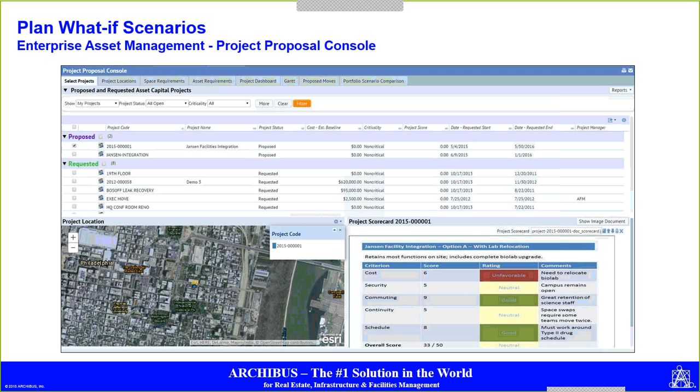We've also taken a look at how to better consolidate the planning process and bring in some of the plans to acquire new assets as part of your portfolio. So as you're planning strategic direction within the organization and proposals for expansions and big retrofits, included within that will be the ability to add more details around some of the requirements for assets in the portfolio.

One of the items I'm most excited about is the strategic space planning application added to the system. What's nice is that it fully engages you to create a number of scenarios about your portfolio, leveraging what you currently have to develop plans going forward, and naturally to generate stack diagrams.

We'll get deeper into this, but also to understand the current capacity of your facilities and measure that against the current allocation and future plans, so you can see when you're going to run out of capacity and availability, and know when to lease more space or add new capacity through construction and acquisition.

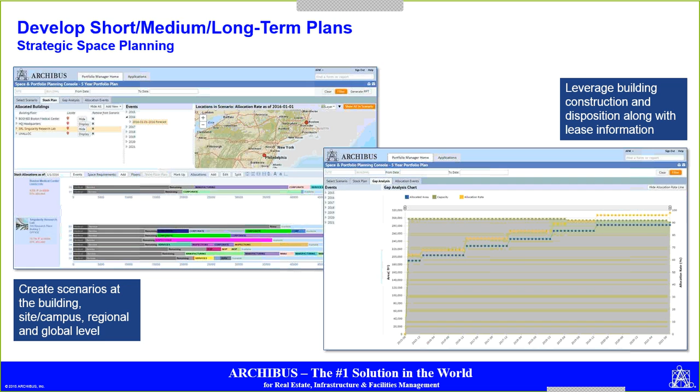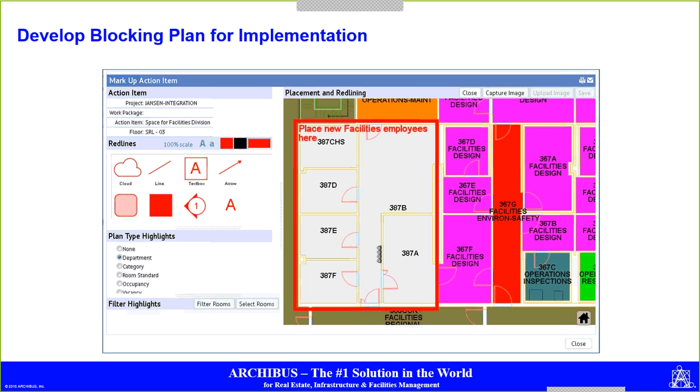We've also incorporated an expanded use of the red line capabilities within the software to help facilitate more detailed planning exercises around your facilities, so you can convert your stack diagram into a combination of block plans and/or allocation plans for what you expect to do in the future.

But before we do that, let's talk a little bit about what it means to go to version 22.1, and how that will impact those of you that already have things like space inventory and performance, personnel and occupancy, maintenance and operations, and a few of the other applications.

To get in line with this, let's talk a little bit about the space planning capabilities of the software and things you can do to better coordinate move activities. One of the things would be to actually generate move projects right from the space console.

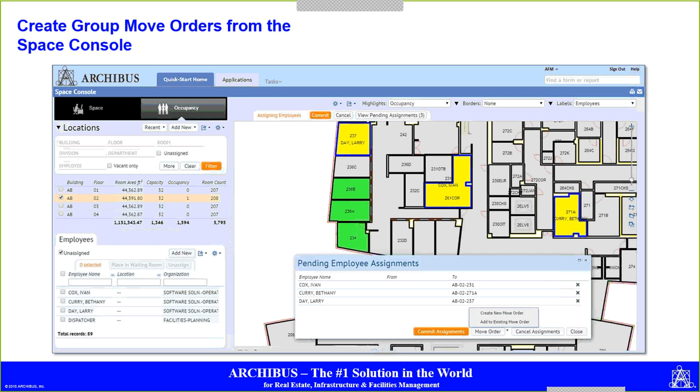In a second here I'm going to demonstrate how easy it is to now create a move project right from the space console as you do your initial planning. So the way to do that, we'll just drop in here and actually see what happens.

We have begun a planning exercise where we've already located some people on the floor plan, and we're in the process of using the drag and drop features to place employees onto the floor plan based on a move we're currently facilitating. We're looking at where we have available capacity and/or vacant space.

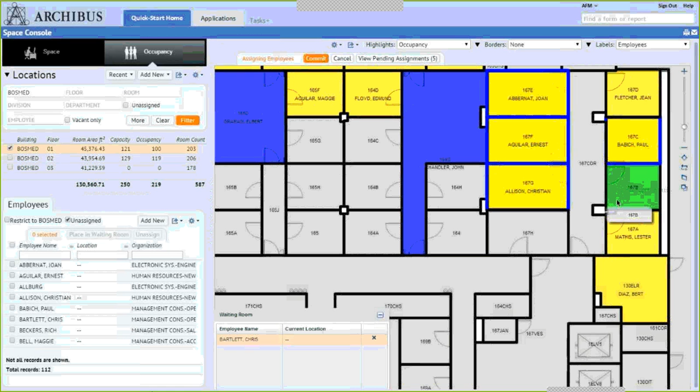Once we've completed assigning people their locations, the next step is to view those assignments. As you can see, we have 5 employees. Typically we would commit those assignments, but what I'm going to do is actually create a new move order, something I'm planning to do at some point in the future.

From this, I'm actually connecting to the move management capabilities of ARCHIBUS, and what I'm going to do is generate a new move project.

If we were in move management, we would actually be doing this, but we can do it right from the space console.

In this case, what I want to do is coordinate the move around the BOSMED building and assign one of the appropriate people to be the point of contact for the move, and then designate when that move will occur at some point in the future—within a 3, 4, 5, 6 couple month window—whatever makes sense for how you plan and coordinate moves.

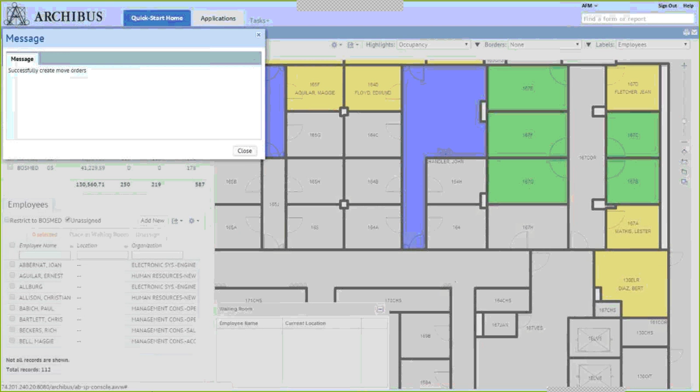Now that I've actually created the move project, ARCHIBUS is creating all of the necessary move orders and looking at the move project. As I use my page navigation, I'm going to go over to the Enterprise Move Management application, and quickly check to see that that was created.

From here you can see that I've created an ARCHIBUS move. Its status is correct, requested, and I have the 5 people I assigned coming from no location into the locations I've designated. What's good about this is now I can use the move management project to do all the move planning scenarios, add additional people, and make changes accordingly before I complete the execution.

So I just wanted to share with you, this is a new feature. It's available in 22.1, and it's something that I found very exciting.

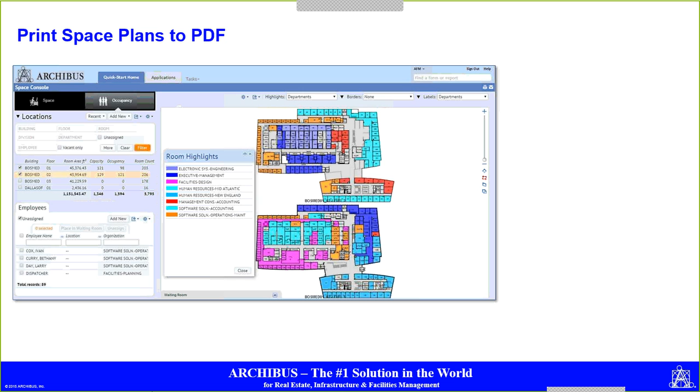Every year at conference, people ask how to print plans from the browser environment, since some rely heavily on paper output. Working with our development team and listening to users, we've come up with an exciting new set of capabilities that give you better control and output to a PDF format for printing.

There are a number of powerful new settings, but the most important is the use of asset text. In 21.3 or earlier, printing to PDF uses dynamic placement of text. In 22.1, you can now coordinate the placement of asset text based on the asset text in your actual AutoCAD drawing files, giving you higher control for odd-shaped rooms where you want text placed exactly where you want it.

You can also control the heights and dimensions of the text to make it easier to read, since often you've output a plan and found overlapping text. So let's go through that process here in a moment.

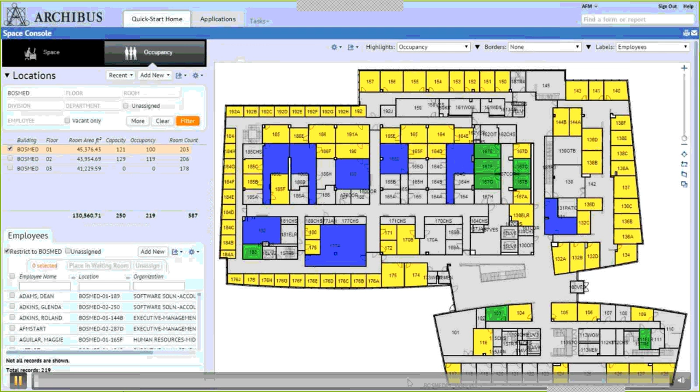What I'm going to do is activate the new command called Generate Ad Hoc PDF Report. As you can see, we have the ability to determine a number of different parameters, and one thing we're going to do is change the text type. We've already filtered just for the BOSMED building and its three associated floor plans, and we've now generated a PDF file.

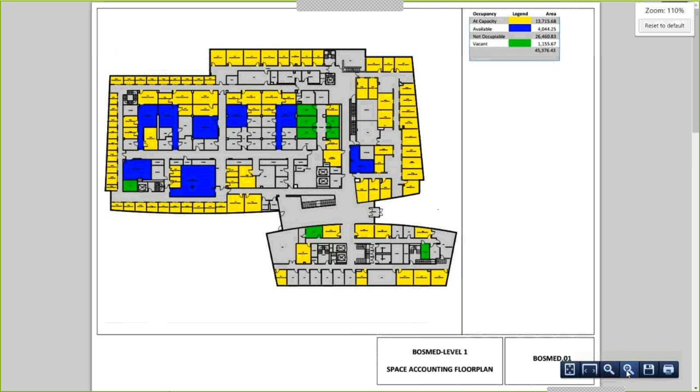The big distinction here is that any asset text in the drawing is now positioned based on the asset text from the actual AutoCAD floor plans, and the size of the text is much better controlled than previously, so we don't get clashes of overlapping text. You can see how easy it is to read, and it generates a PDF file for you to work with.

Moving on to other improvements, let's focus on the building ops console for those that use on-demand work. One key area people have expressed concern about is performance, and what we can do to better enable people to jump in and view the information.

There are some new parameters we've added in the settings that I find very exciting. One is the ability to collapse the bands of different types of work coming into the screen so you're not loading all the data at once. Another parameter controls the number of records displayed in the band, loading them progressively until you reach the full amount. This makes life easier and speeds up the performance of the consoles.

Let me jump in and show you what I mean. We are in the home page for facilities, and we jump into the building operations console. As it comes up on screen, you see the banding, and we're displaying 20 records at a time within the system. As we scroll, we can load more data, as you see me do here, so I can progressively scroll through all the records I need to view.

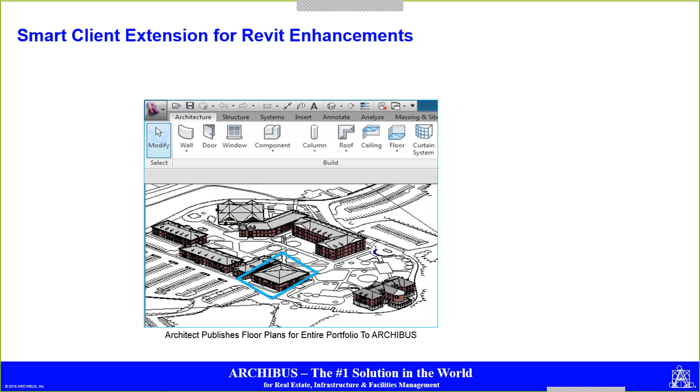What are some other things we're doing? We're continuously evolving the use of the Smart Client extension for Revit as more users grow interested in what it can do. We're making sure we have connectivity between the Revit models and the ARCHIBUS database, and that includes linking to all the different models that are created. So in addition to the architectural model many people work with, we can now link to the mechanical, electrical, and plumbing models as well and pull in that data for information. I don't have a demonstration for you, but if you contact Robotech, we can certainly arrange to view that.

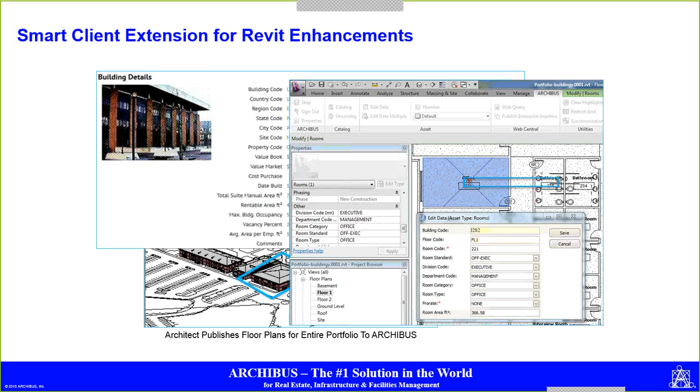Looking at a couple of other enhancements across the product applications, one area of interest for a lot of folks is tracking all the different parcels associated with their properties and managing some of the taxes. So we've set up a mechanism by which you can identify all the parcels and schedule payment for taxes within the system—a new feature I think a lot of people who do real estate portfolio management will be happy to see.

Another great capability is the use of geospatial capabilities involving both Esri and now Google Maps, and I want to stress that it involves both Esri and Google. There are a number of things you can do, including mapping locations of your assets, properties, buildings, assets, people, etc.

As you can see, when you're zoomed out, it clusters a number of items, and the goal is that as you zoom in, you can dig into deeper details and uncluster those markers. At the same time, the markers have added new capabilities, providing a range of colors to denote certain capabilities, and size to denote a level of scale associated with the properties in question.

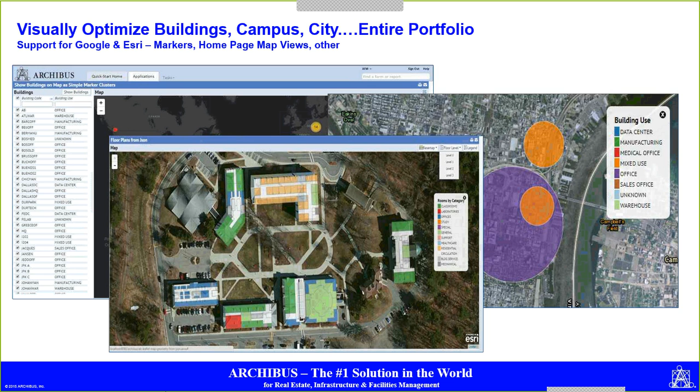Finally, we continue to improve the ability to take your campus-style map and place the footprints of those buildings on the map, then use that to drill down and see the variety of floor plans you have, so you can see how space is being allocated or classified across your campus for a variety of uses, helping with planning going forward.

Finally, for the nerds in all of us—and I can't say that I'm nerdy, but I do have to start and stop my local system.

We have taken the capability of doing all the systems administration roles for starting and stopping the various servers outside of the smart client and placed them in their own setup console, so people will be able to restart their servers for any number of reasons as they apply changes to their databases. These are just a couple of the settings you'll see in the console, and for those who do that a lot, you'll notice that has been split from the smart client itself.

Moving on to some of the fun new stuff, one of my favorites is strategically planning space. Let's take a look at what that means for us.

The goal here is to enable anybody to go into ARCHIBUS and leverage the data that exists within it to develop plans, whether across the entire portfolio of buildings you have, or for a number of buildings you want to plan specifically for. It can be within a given city, state, region, or across an entire country, depending on the kind of plans you want to develop.

So naturally, we want to start with a simple thing: developing a space forecast, using the current inventory to help define what that means. Where do we get that forecast information from? Exactly from ARCHIBUS, at the level of detail we determine we want to look at—it can go up to the business unit, down to the department.

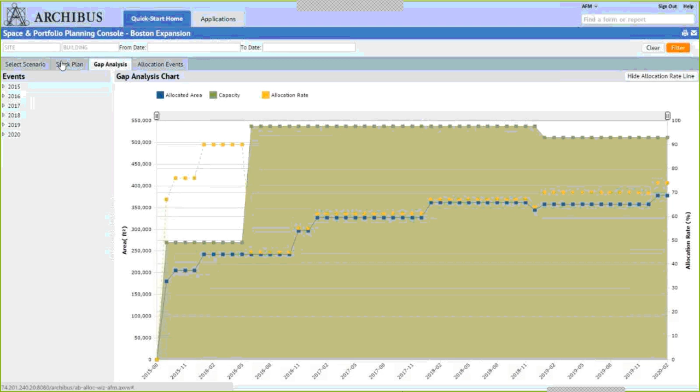Let's return to the stack plan, where we can see how we've allocated space for the year 2017. Let's start looking at some planning by generating a markup. In the markup, we'll do some simple blocking plans, using some of the new redline capabilities to help denote what's going on.

In a case where we don't exactly know the floor plan, we could turn off the highlights and assignments of space to departments and do a more generic placement of space on the portfolio. So we'll drag and drop some areas to denote the blocking plan, highlighting the areas in question and allocating the space as best we can.

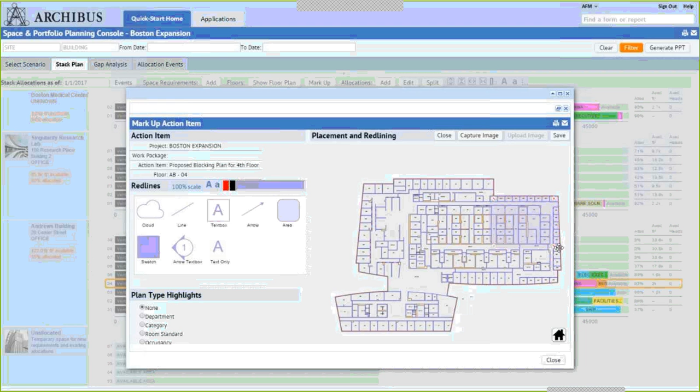We do that for as many places as we have, being sure to identify which departments we're looking at. I'll speed through this a bit so we can get to a finished, or at least quasi-finished, example. The goal is to allocate a number of different areas.

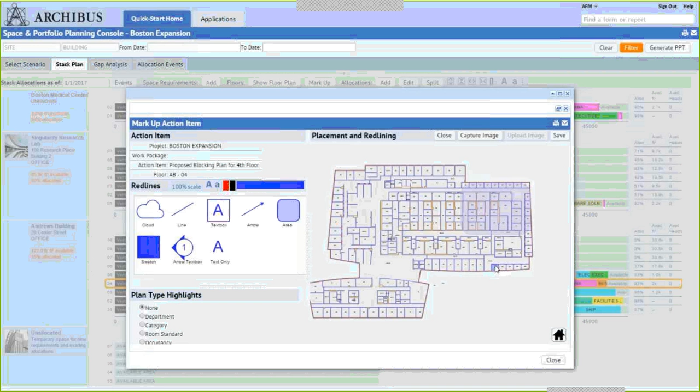As you can see, your demonstration jockey—me—doesn't always push the right button, but here we're grabbing a different area to represent another part of the allocation stack plan we talked about, making sure to assign the space. We'll add one more in the sequence to fulfill at least some of the front planning. You'll notice I can allocate as many different areas as I want and choose what parts of the floor plan to work with.

The whole goal here is to help the people doing that initial stack diagram take it to the next level, deciding how they want to allocate space on the floor. In essence, what they're doing is saving that change and making it part of the planning process.

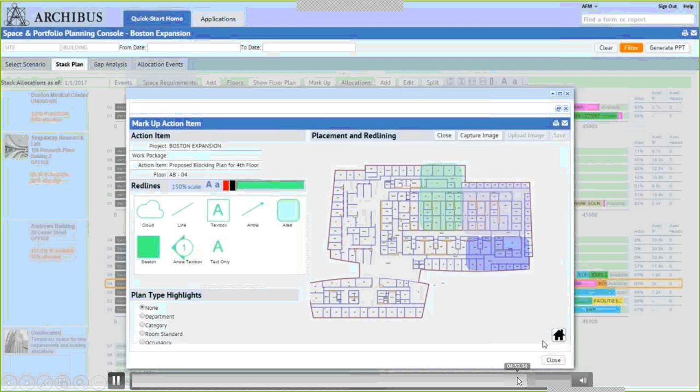So we'll go ahead and move on to the next set of steps here. We've saved this, made that part of our planning exercise. Not only have we done the stacking, but we've now incorporated the ability to do some of the blocking and assignment of space to help the planners determine the next steps once the plan's been approved.

As we move through the various stages, notice on top we've actually taken away the Boston Med building because we are no longer leasing that space, and that's tied directly to the lease tables because the leases have expired. In the meantime, I've done everything I can to take the planned space requirements from down below, called unallocated, and from the Boston Med building, I've dragged and dropped all the space necessary to move it to the different buildings to consolidate space.

And if you look down below here in the Andrews building, one of the things I did was create new space that did not previously exist, because we didn't have that kind of organization. It could be based on the acquisition of a new team, or the acquisition or creation of a new capability, and we've added that as part of our planning process.

So at the end of the day, we can plan any number of portfolio changes based on constructing new buildings, leases starting and expiring, or buildings purchased or sold. The scenarios can include things like forecasted growth or new business lines added to the organizational requirements. From that, we can generate the blocking plans we need to move from the strategic down to the tactical when the time is right.

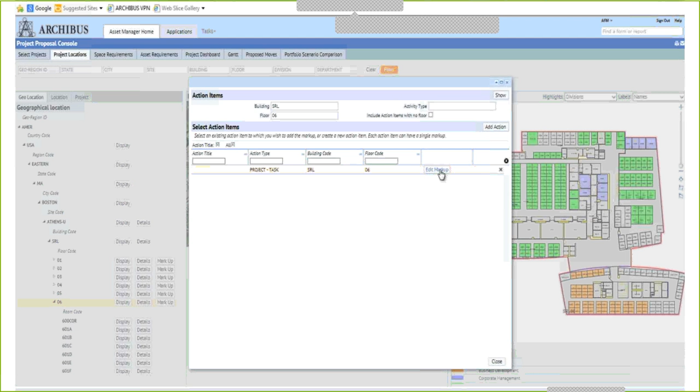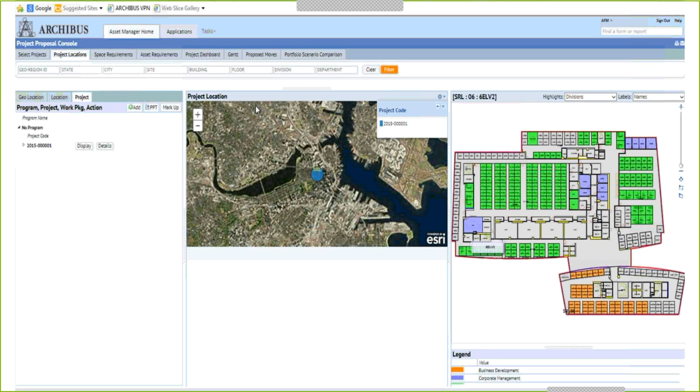Naturally linking any sort of markup, similar to what I did in the strategic planning capabilities, so I can position maybe the placement of new assets within the portfolio, or assign what organizations are going to be there. This ties back to the portfolio planning process. But at the same time, I can also generate this output in such a way that I want to share the information about the project for people, and actually pull that information from ARCHIBUS and reflect it in a PowerPoint so I can see some of the details I'm trying to process.

So we pull in those space requirements using the forecasting that you saw before. We pull in the asset requirements, identifying what we need for assets in the portfolio. Maybe we're going to be buying some new test equipment, medical equipment, or production equipment, and we want to make sure that's included in the plan because it requires a lot of detail in terms of what items we will need to properly assess all the tasks and investments to pull together a proposed plan moving forward.

Naturally, we can use this as a planning exercise to show what the timeline is for a given project, so we can see what is supposed to happen and when. Again, we're tying in our project management capabilities.

And then finally, once we're done looking at the various projects, we can start comparing various scenarios to see what makes the most sense in terms of analyzing the portfolio within the system. These are capabilities that are very useful in linking multiple aspects of ARCHIBUS to help you do the planning necessary for future changes to the organization.

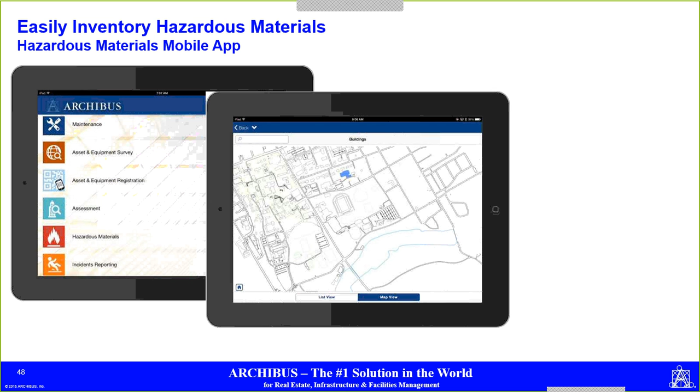In sequence, the next thing we want to do is take our hazardous materials app, which was previously named MSDS, and go through an extensive ability to inventory those assets. We've also created a mobile app to help support that endeavor, and the goal is to sync with the various locations in our portfolio and be able to pinpoint on those floor plans where we have different types of assets, hazardous materials, and the types of materials that we have.

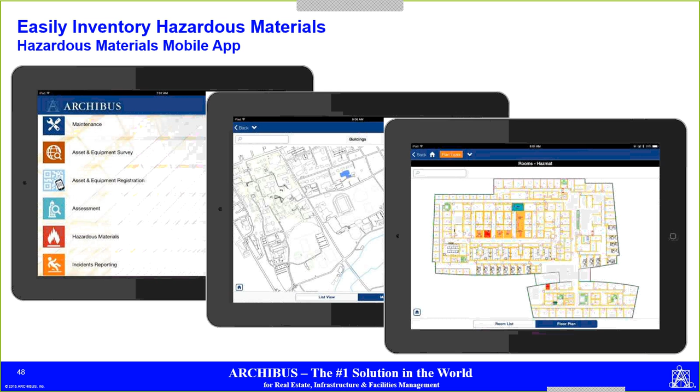But we took it a step further. We also inventoried much more closely the different materials in those rooms, identifying each by room location, but also the quantity and amount of those items in the inventory and when they're available, and then attaching the relevant documents, the safety data sheets themselves for those people that are needing them.

In doing that inventory, we can do it not only at the room or space level, but we can actually go to a shelf or a cabinet and a bin and identify very precisely where we can find these materials, which is very useful for emergency preparedness. So now we can look at all the materials within our facilities and identify the severity of those items, where we can find them, and when was the last time we checked the materials.

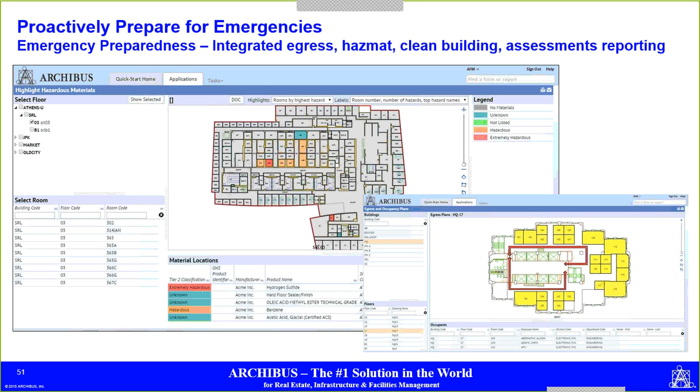This is great because now with emergency preparedness, we can link all of this information back into ARCHIBUS, and for first responders, we can better identify where the hazard conditions are, and what situation a responder would be looking at if they were to arrive. At the same time, identifying the location of all employees and all access and egress routes that we already do within the application.

We have also taken steps to make it easier to send out notifications via bulk email so that you can do site-specific or department-specific requirements.

It seems like last year, in Boston at least, it would have been nice to have the notifications that we would have needed to issue with respect to all the snow days that we ended up incurring as one form of emergency, but naturally any sort of fire or electrical damage or other storm-related damage that you could certainly experience at a given point in time.

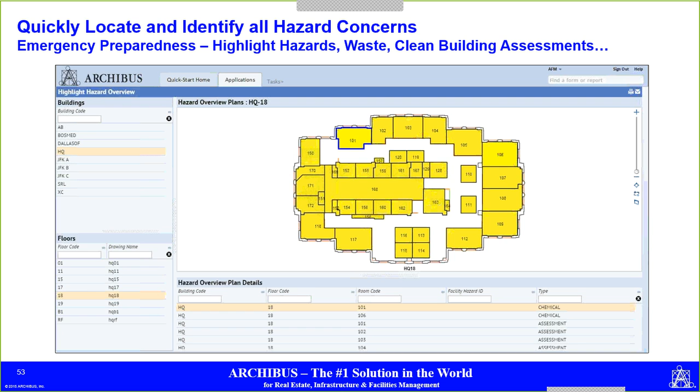So it's important for us to help facilitate the information contained within ARCHIBUS, not only from a hazardous materials point of view, but hazardous waste or an assessment of asbestos or something like that, so that first responders know what to deal with.

Moving on to energy management, we continue to help facilitate the use of energy information to better understand what's going on. The goal is to do a better comparison of how we did this year versus the previous year, so we can understand the impact of energy conservation programs, and make it easy to determine the effective cost per square foot of different types of buildings. Whether you're dealing with a warehouse, office building, research building, or data center, you can see where the costs are being applied at different buildings.

Also, if you're tracking your energy bills and the meters that you have, you can get alerts from within ARCHIBUS to identify where there's a discrepancy from what you've measured versus what you were billed. Looking at that data, you can read through specific details and determine what the values were and why there's a discrepancy in the billing, and then associate that back to a very specific meter so that you can work with the utility to make any corrections.

So it's been a pretty extensive presentation. We're at the top of the hour, and what are the next steps?